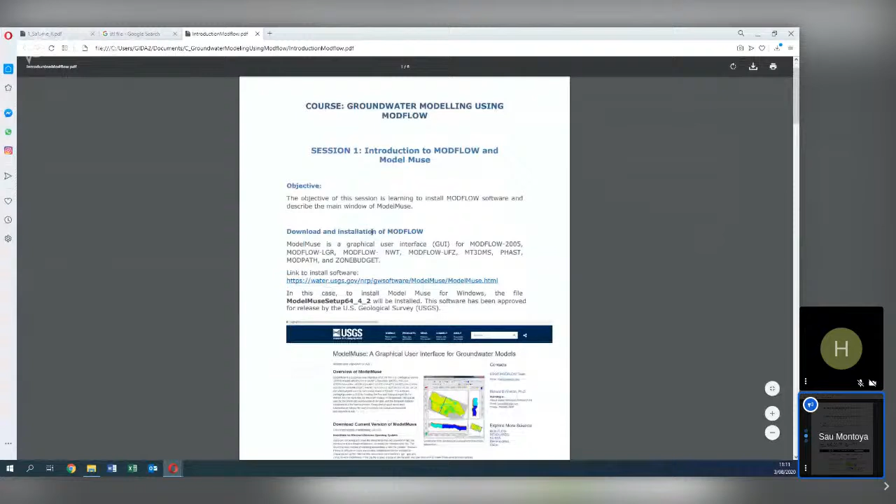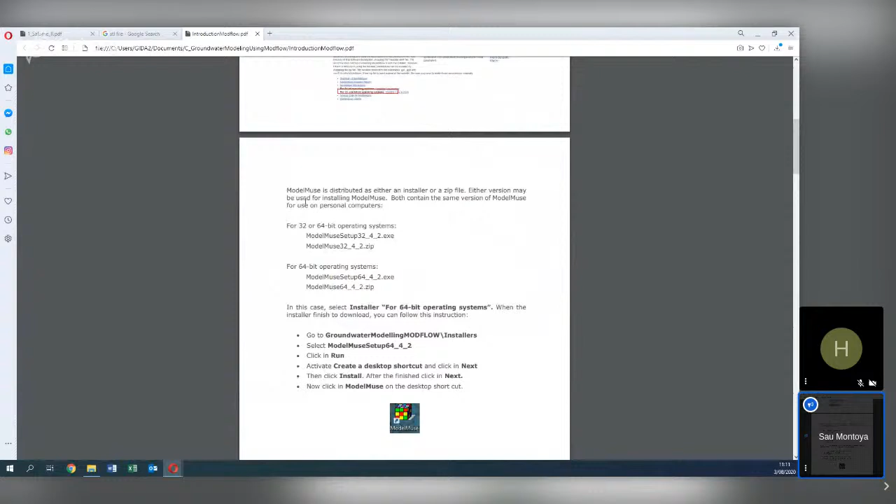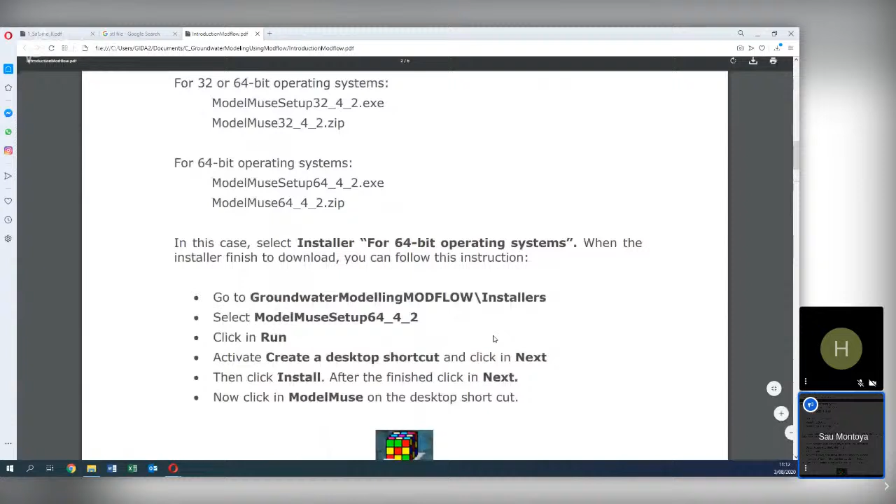So I will open this. As we have said, ModelMuse works with all of these models. You have already downloaded and installed it, that's what you told me. Now we are going to open ModelMuse. On your computer, look for ModelMuse. Actually, it opens on the other screen. So here I will open ModelMuse, and that's it. This is what appears. Maybe you have it on your desktop; I don't have it on my desktop, but if I type ModelMuse, it appears here.

And then you have these options. If you are here with me, type yes, please.

Okay, great. I will explain what is here. You can create a completely new MODFLOW model, but you can also create a PHAST model. A PHAST model is a transport reaction model that implements another code, I guess, plus PHREEQC. So this model is required when you have, for example, a contaminant plume that is degraded, or the contaminant species are being speciated into other chemical compounds. When you want to deal with that, I strongly recommend PHAST.

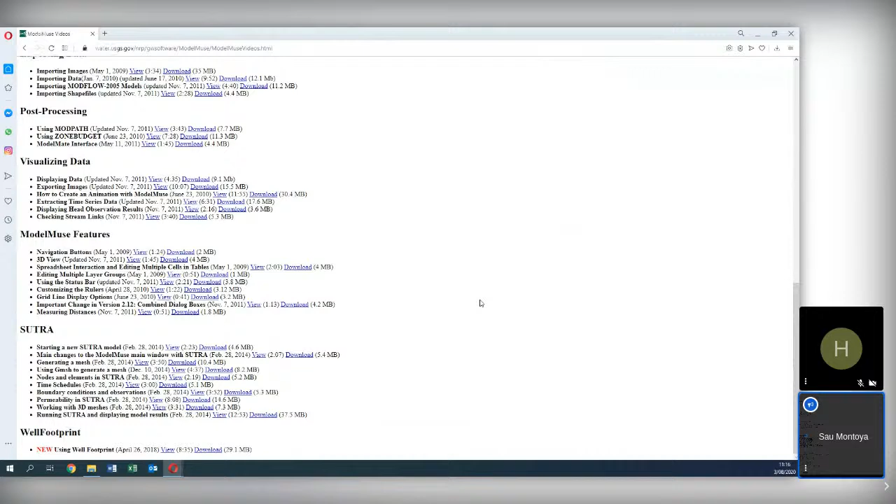So if you are learning it, or if you want to do consulting or research or your master thesis or something, I strongly recommend watching these videos, because these videos are really important if you want to know more about the software. I have watched almost all of them.

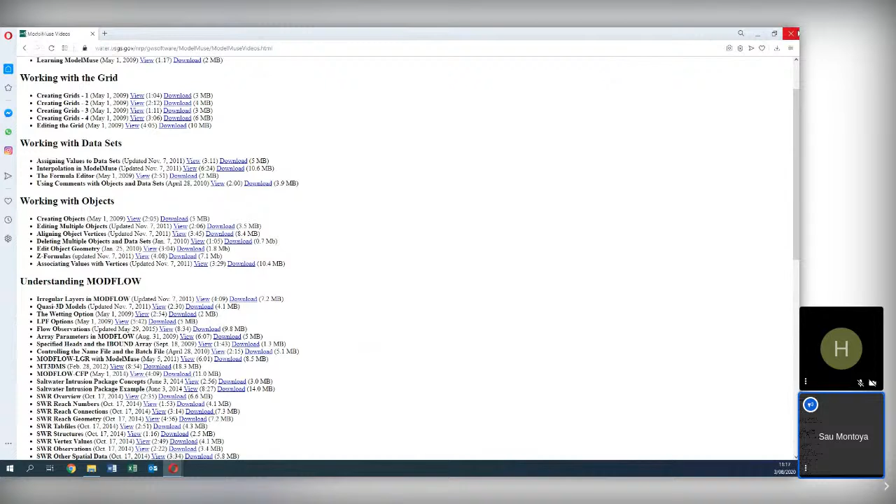Okay, so everybody create a new MODFLOW model and click next. Okay, so if you are here, this screen is informative only. And I hope that you are here with me. Let's talk about the spatial temporal topic of modeling with MODFLOW and ModelMuse.

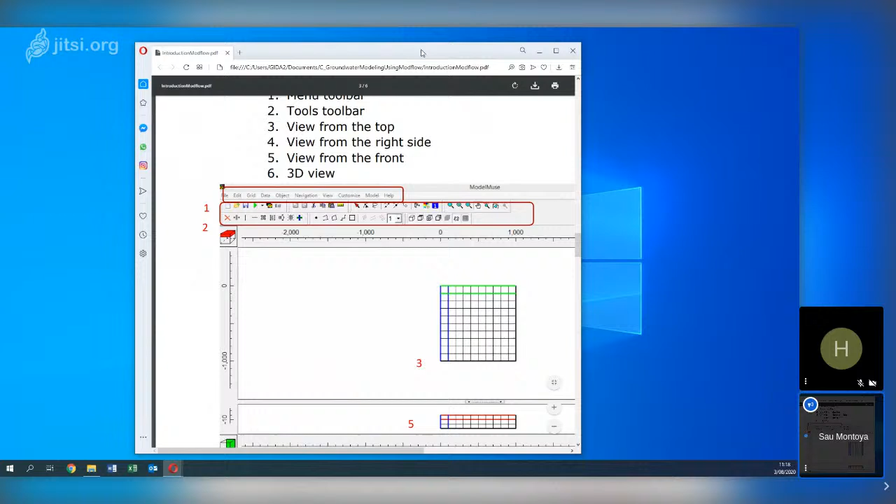If you work in MODFLOW, it actually does not care where the model is located, because what MODFLOW cares about is the grid and the position of an object in the grid. This is the first thing that you have to remember. For the model, a coordinate system is a system that allows you to put any object in the grid. But what will happen if you have to make a repository of your model, and any person five years from now has to know where the model is located?

For example, something happened and a guy only found a file that says model one, and the guy says, "Where is this model located? It appears to be a basin, but I don't know which basin it refers to." That's why here you can put some metadata regarding the projection system. With this projection system, a future user or a colleague can locate exactly where your model is located.

It can work with EPSG or Proj4. For example, here in Peru, this is our EPSG code, 32718: 32 is WGS UTM, 7 because we are in the southern hemisphere, and 18 because we are in zone 18. But this is only declarative. You are not required to use it during the simulation. This data won't be used in any part of the simulation; it is just to provide the right metadata for proper interoperability of the model.

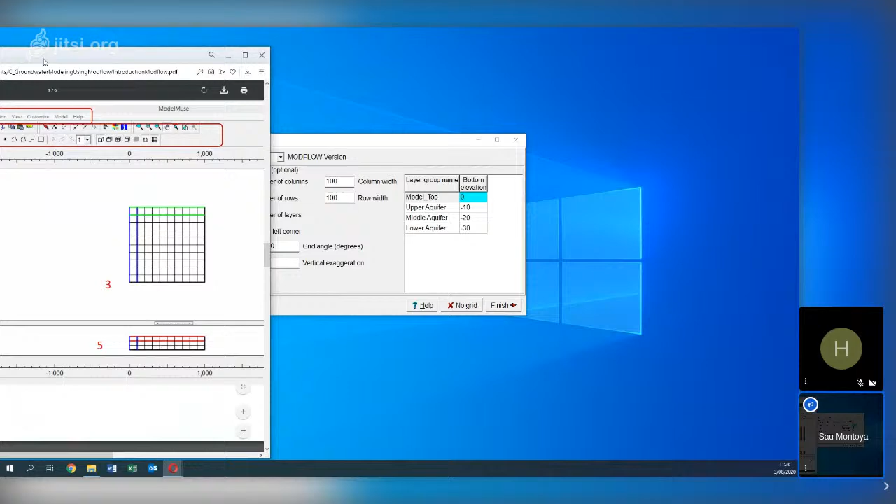Some of the tools of MODFLOW 6 are available in Model Muse, because Model Muse does not implement the unstructured grid yet. Then we have MODFLOW 2005, which is only finite difference methods, so you can create regular grids of rows and columns like this one. However, when I wanted to do regional modeling, on the scale of basin modeling with complex geometries, I could not reach the solution with MODFLOW 2005 because the matrix was very intense, non-diagonal, and the solver could not find a solution for the model.

That's why MODFLOW NWT came. MODFLOW NWT is a Newton-Raphson solver of groundwater flow that is more flexible with complex geometries, with dry cells, and I think with great changes in hydraulic properties. So if you have a K of 10 to the minus 5 close to a K of 10 to the minus 3, two orders of magnitude from one cell to the other, sometimes in MODFLOW NWT you can have better results.

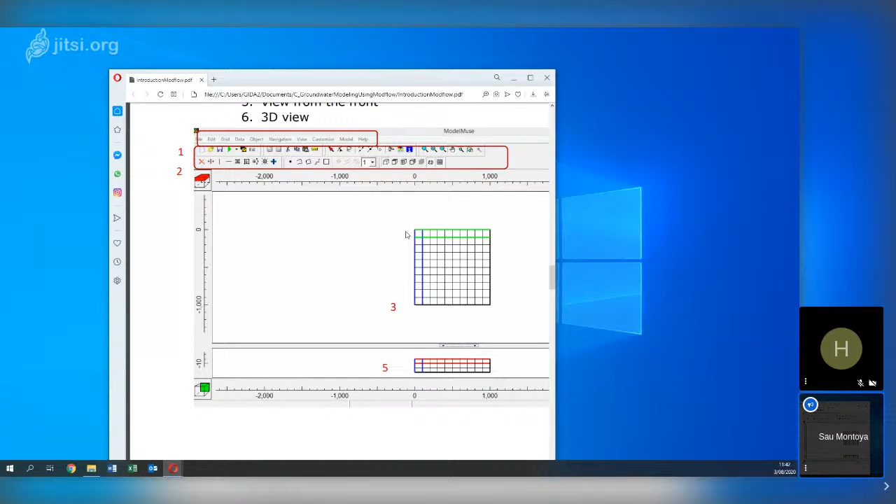That is not the same as the geospatial zero origin, because this is the geospatial origin, but for the matrix, this is the origin. So in our case it will be 1000, 1000. If you are here with me, type finish and write on the chat yes.

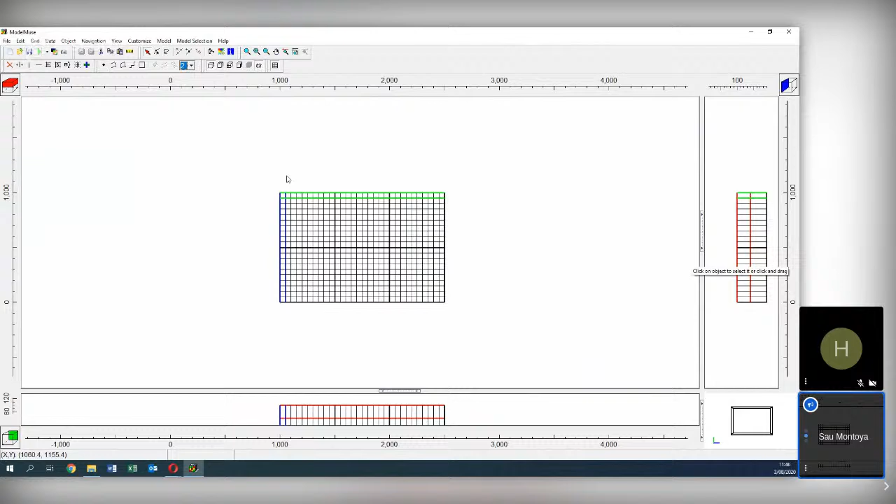Okay, so finish. Great. So here you have your model, and the model has 20 rows, 30 columns, and this is the aerial view of the model, and this is a cross section on this line, and this is a cross section on this line.

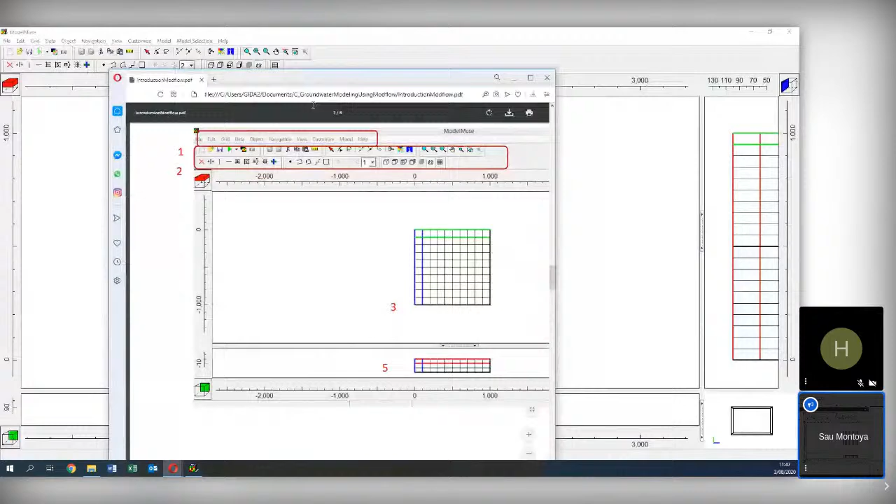Great. So the objective of this class was to show you some of the functionalities of ModelMuse. First of all, line 1 here is the menu toolbar: file, edit, grid, data, object, and so on. This is the menu, and these are the tools toolbar, where you find the tools.

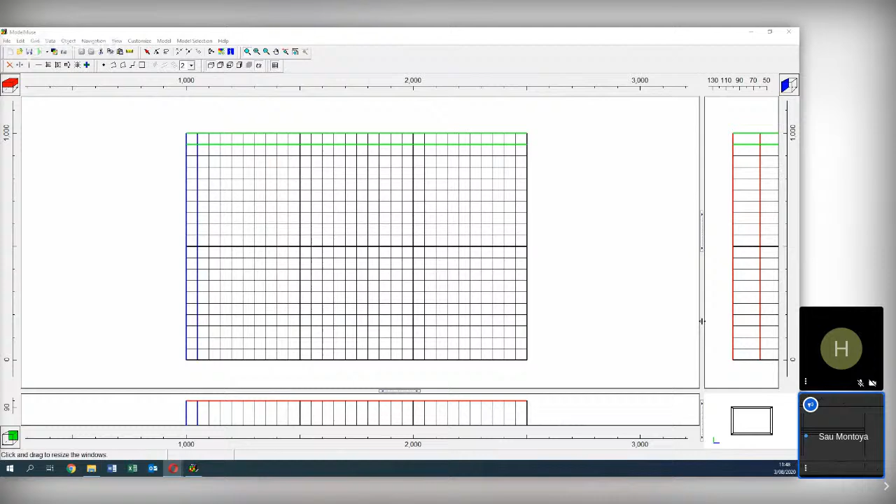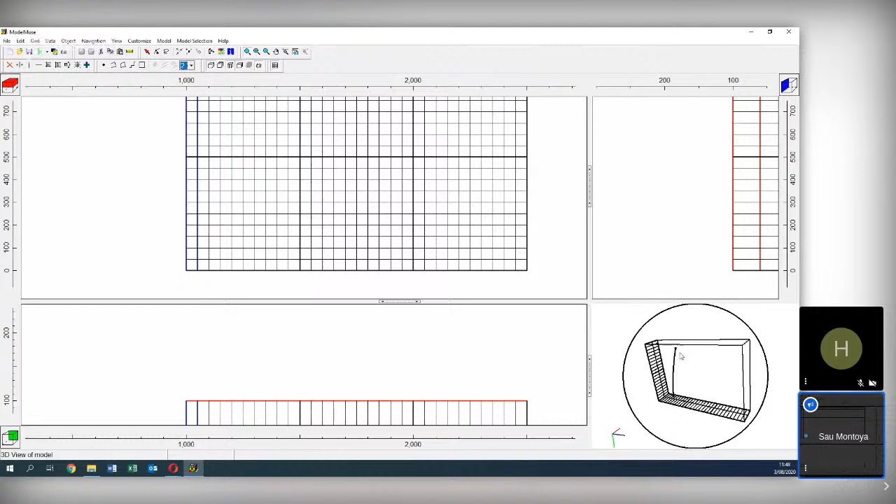This is the view from the top, this is the view from the right side, and this is the view from the front. And here we have a 3D view. This 3D view is basic, and here you can add the grid and a grid on the cross section. You can rotate it with your mouse, and with the right click and up and down, you can zoom as well. The resolution is not the best, but it's really handy when you want to locate boundary conditions or see if something is there.

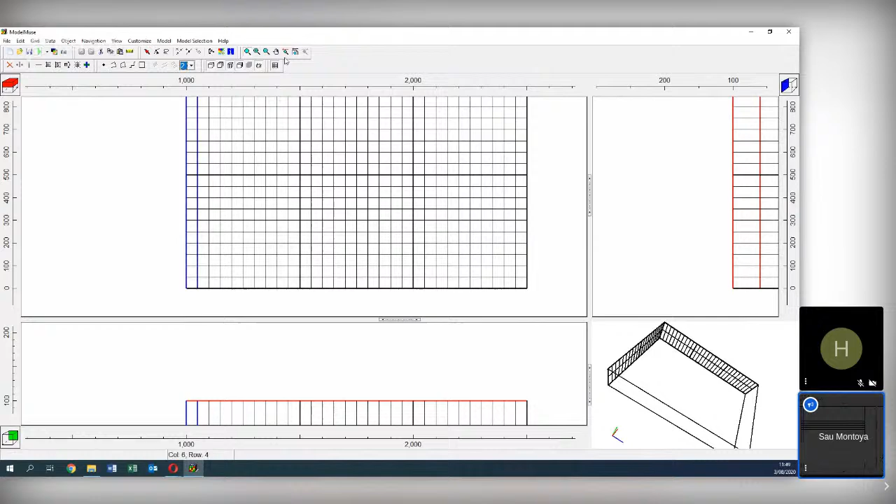Great. So let's see. We have pan with the hand. We can move our model, and we can move it on the cross sections as well. So just try this, please. You will see that the coordinate we defined as 1000, 1000 is actually this point. And you will see that some of the lines are thicker than the other ones.

Do you see that this line is thicker than the other ones? What does it mean? When a line of the grid is thicker than the others, it means it's a multiple of 10. So this is my first column, second, third, 4, 5, 6, 7, 8, 9, 10, and then you have the thick line. So if somebody asks me the number of columns and rows, I say rows 10 and 10, 20 rows, and columns 10, 10, 10, 30 columns.

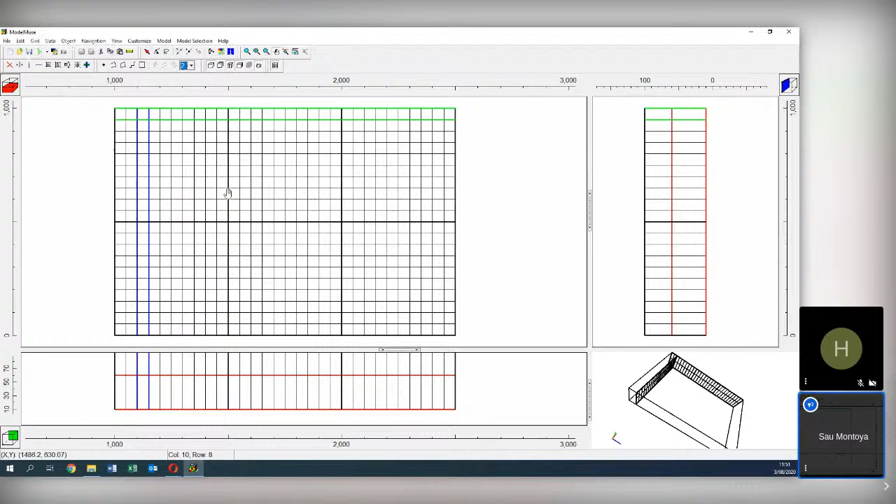And here as well you can do it with the cross sections. Here you will see some changes, because if you press here, you will see the cross section in this alignment. Since the geometry is the same, you will see the same cross section. But when you are dealing with regional modeling, there is a big difference in what you see at every cross section. Okay, great. What else?

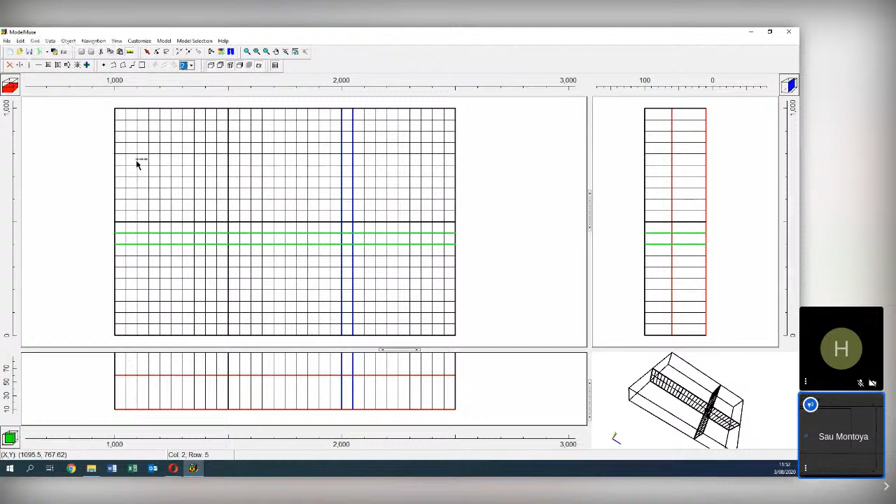Then we have the ruler, and then we have another ruler here. For example, my grid spacing, my cell size, is 50 by 50, so I can check this. This is around 50, great, and this is around 50. So I can tell you that the cell size of my grid is actually 50 by 50. Okay, great.

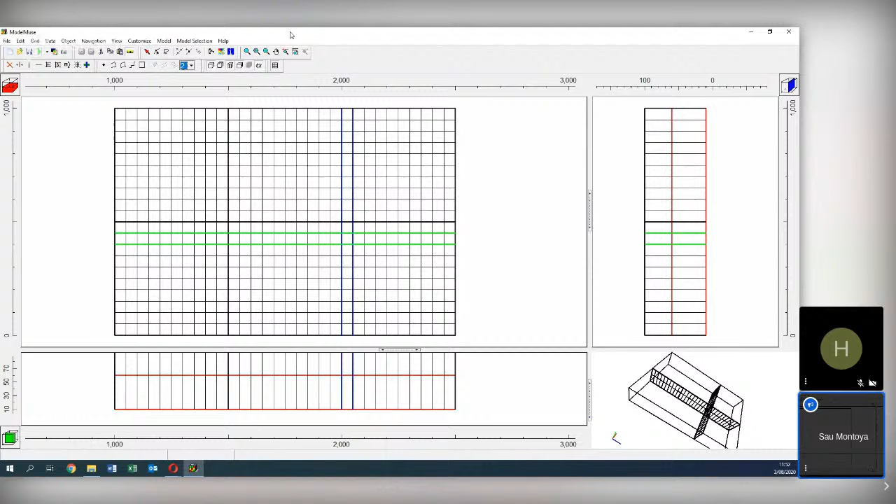And then here you can see the coordinates. What else? I can zoom in with this one, zoom out with this one, and this is zoom window. Okay, so zoom window, zoom in, zoom out, pan, and this is zoom to previous. So what does it mean? If I have done a zoom here and I want to go to the latest zoom, this is my zoom previous.

Then there is a question here: shouldn't the colors in the vertical views be opposite? I should have two cells in each, in the vertical. Why? The green color means this cross section, and the blue color means this cross section. Only the nodes where the cross section is, what you are seeing on those cross sections. Okay, right.

Let's move on. If you have followed the tutorial of the installation, you should have ended up with a folder on C, and for example here I have MODFLOW 2005, NWT, and some budget programs. For example, here what I will need is MODFLOW 6.

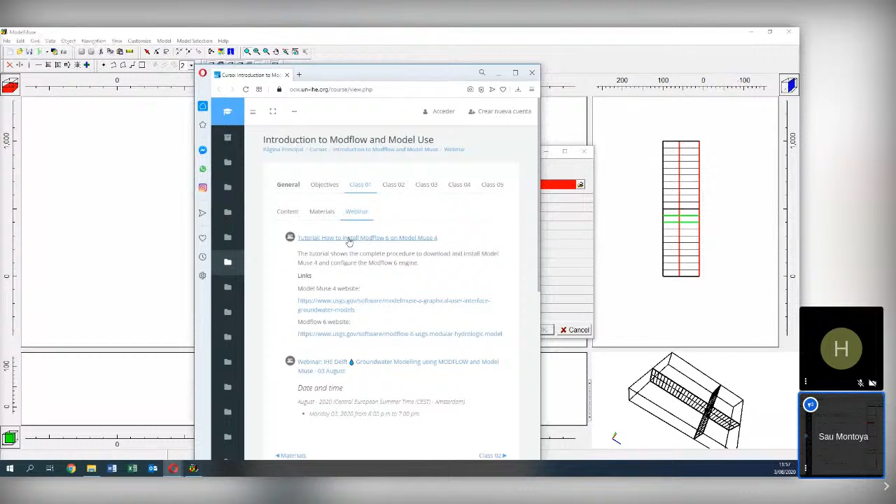The complete tutorial is here on the course: tutorial to install MODFLOW and ModelMuse. I will drop this on the chat, and then you will see the WRDAPP folder. You have to create it on your own, and then you have to place the files there. So watch till the end of the tutorial, and then you will have a successful installation. Okay.

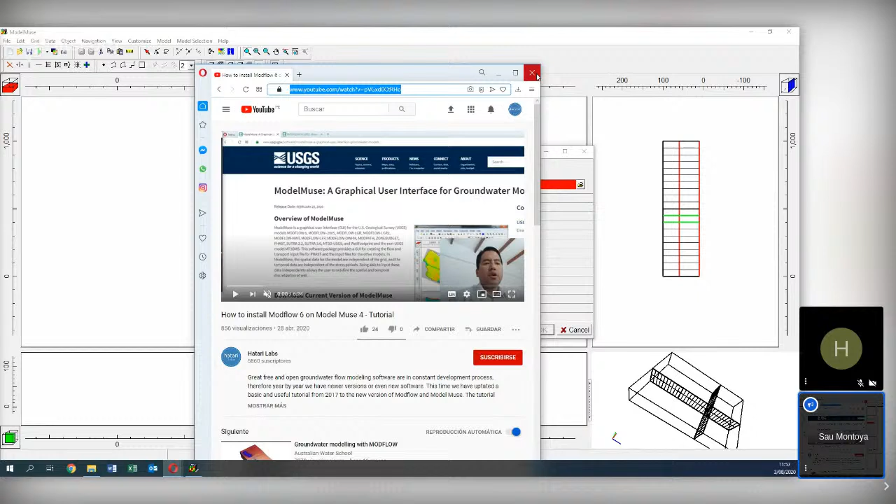So here, for example, I don't have MODFLOW 6. I do not have this, but I have here a link. So what I do is I double click here, and it will redirect me to the MODFLOW 6 website. And I say, okay, I want to download MODFLOW 6 for Microsoft Windows. Yes, open this, and it will start downloading MODFLOW 6. That is 6.1.1, that was released this latest June.

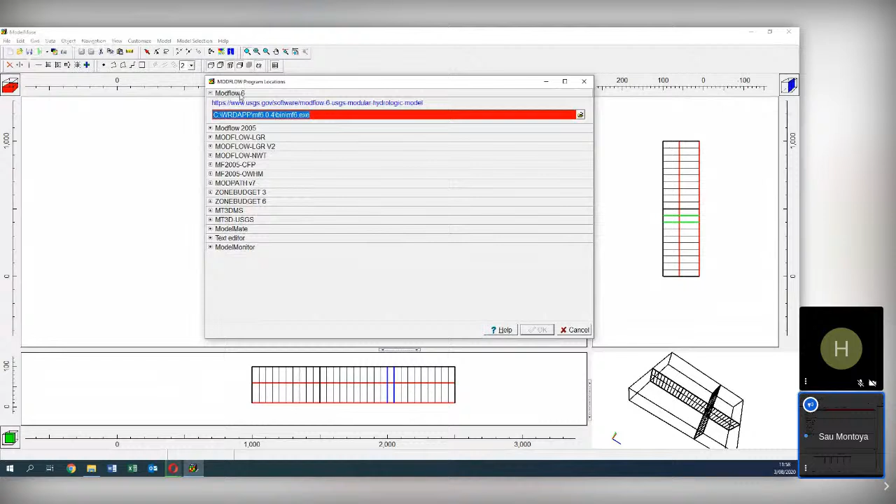Okay, actually it's downloading. It will take some time, so I can explain some things here. Here appear some of the MODFLOW options together with some other options for pre- and post-processing. So here we have the engine for MODFLOW 6.

For example, here I do have installed MODFLOW 2005. I do not have MODFLOW LGR. I do have MODFLOW NWT. I don't have MODFLOW CFP. I don't have MODFLOW OWHM. And for example, MODPATH. What is MODPATH? MODPATH is a particle tracking model, and this is coupled to MODFLOW.

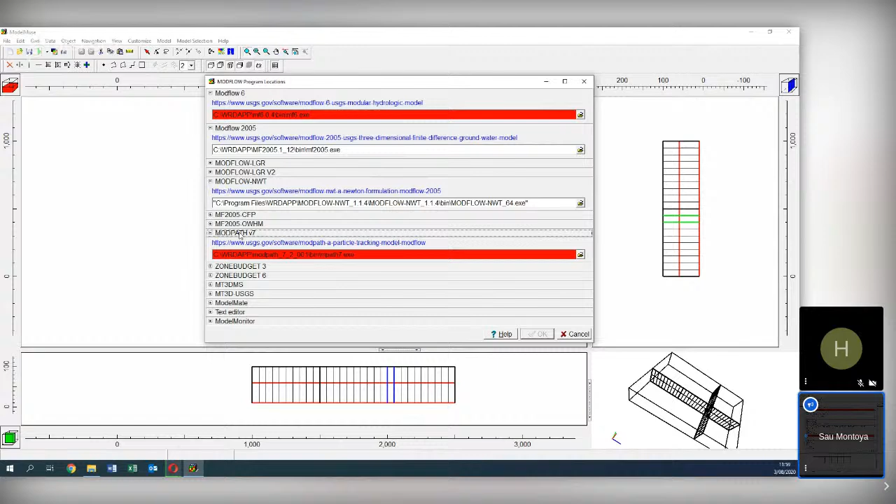What does it mean? That if I have a groundwater model and then I want to see the trajectory of any particle, MODPATH can simulate the trajectory, the path line of this particle. Then you have ZONEBUDGET, and what is ZONEBUDGET? If you want to do the water balance analysis of a certain part or a certain boundary condition, you can do it by defining a zone budget.

Then you have MT3DMS and MT3D-USGS. What is this? This is a transport model that is also coupled to MODFLOW. MT3DMS was done by the University of Alabama, around the year 2000, I guess, or maybe I can be wrong. And there is a latest version, MT3D-USGS, a code developed by the USGS that was released 5 years ago, I guess.

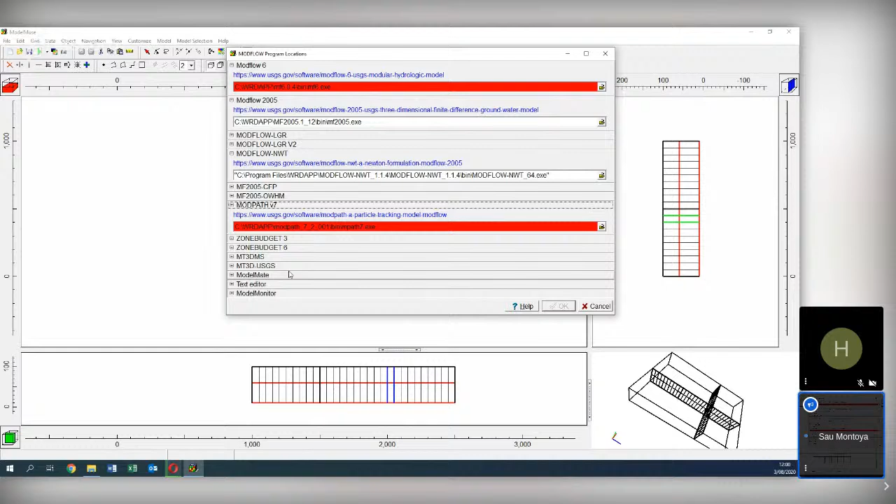If you want to do some sensitivity analysis or automatic parametrization, you can use ModelMate. And then the text editor by default is defined as Notepad, and the model monitor is this one, a utility that will help us when you run a model.

Okay, so please tell me whether you have MODFLOW 6 installed on your computer. If you have MODFLOW 6 installed on your computer, please type yes or no.

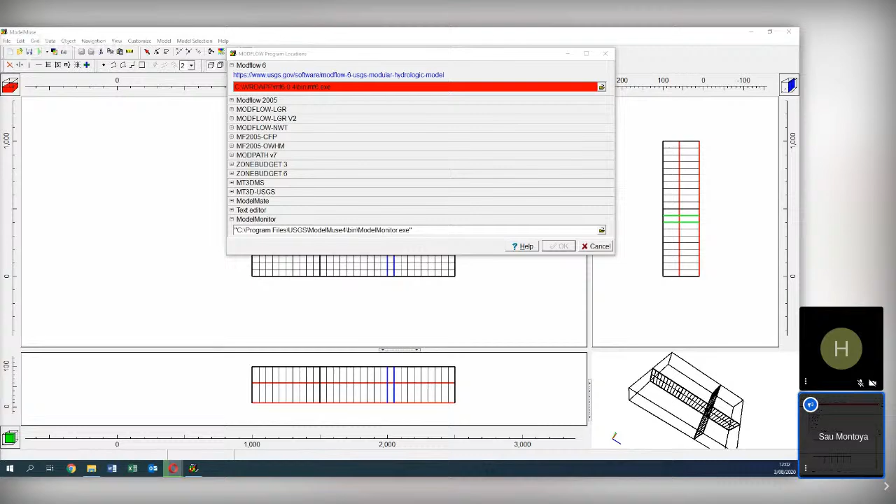Hans, are you there? Yes, I'm there. Hans, would it be methodological or pedagogic to have a 10-minute pause here, or do we go everything in a row? I mean, it's really up to you. How long do you still have to cover? The half, because it was designed for 1 hour. Okay. I think you can better continue given that people have reserved the time now and their bandwidths. Okay, okay. Yeah, so let's continue.

I can install MODFLOW 6 later. Okay, so the objective of the second part is learning the function of the basic tools. So here we have the five geometries available in ModelMuse. This is the point, the line, and the polygon. However, you have these two options that are really close. This is a straight line and a straight polygon.

Okay, so what does it mean? If you do a polygon or a line, for example, I will do a line because this is easier to show you. Okay, let's go. I will do a line. This is a normal line that you can define anywhere.

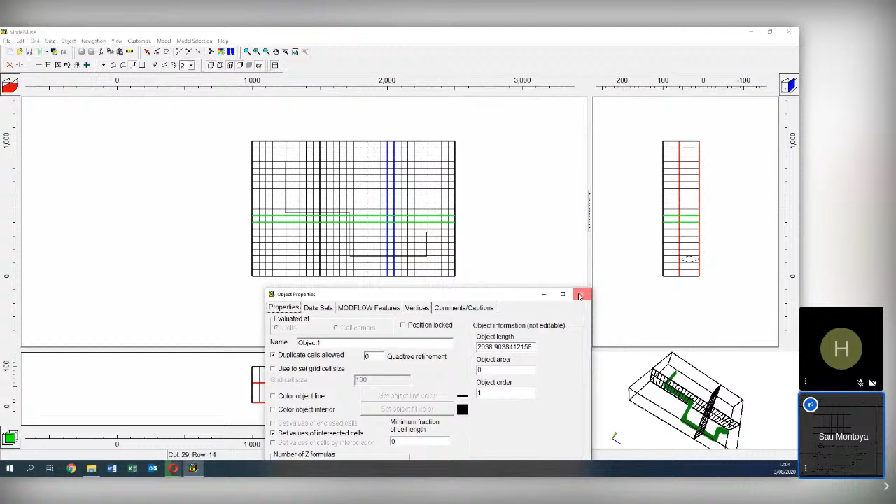But if I select this, I can do a line, but only parallel to the axis, to the x-axis and y-axis. So this is a line, but a line that can be only parallel to the x-axis and to the y-axis. Okay, great.

And this straight polygon is also a polygon, but it can only be parallel and it has to be a square. So this is the difference between these two. Actually, those are special conditions of the point, line, and polygon.

If you are going to select a river, you can do it with lines or polygons. If you are going to create a well, you have to do it with points. If you want to represent a river, it will be a polyline.

And if you want to select a wetland, you can do it with polygon. Okay? So this will be mostly related to points. This will be mostly related to streams. And the other ones will be related to wetlands or to protection zones, or will be related to contaminant sources as well.

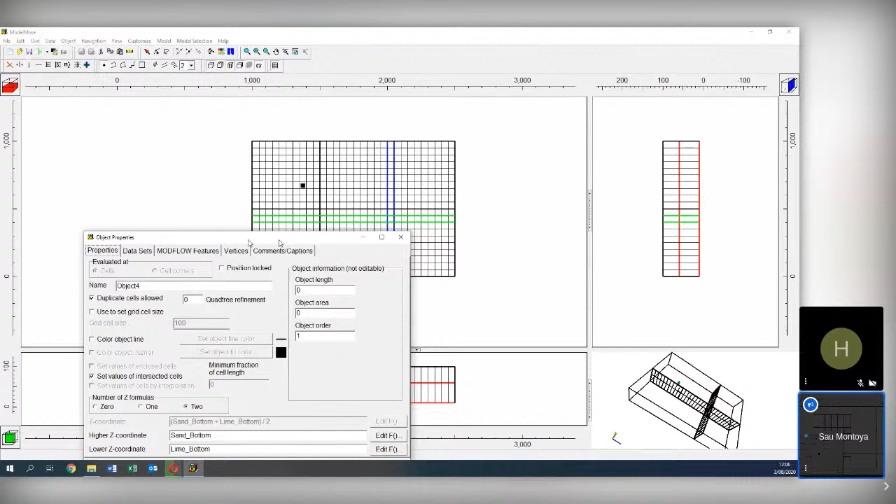Okay, let's have a look on the different conditions here, because it can be that you have some different names here, but there is no problem. Yeah, but please have a look, and then we are going to review all together.

Okay, so here this is the name. The name is actually aleatory, so we can type well, for example. Well. Okay, great. Then what else? Then we have the object order. For example, for me it is the first object order. If you have done any object before and then you have deleted it, this object order actually is the index of all the objects that are on the model. So in this case, we only have one, so it will be one.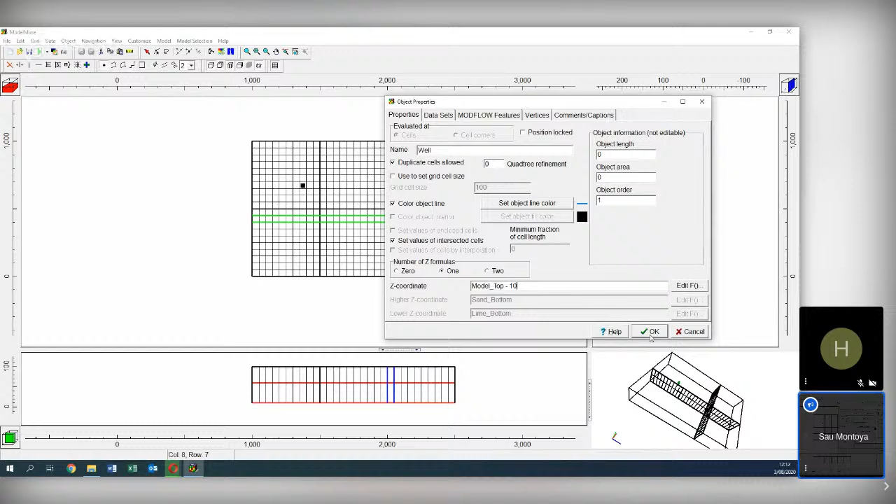And then if I go here to data, not to grid, if I switch to discretize by vertex, which we are not going to do, but there are tutorials on that, we can do quadtree refinements. Okay, that is a type of local discretization in MODFLOW, but we are not going to do that.

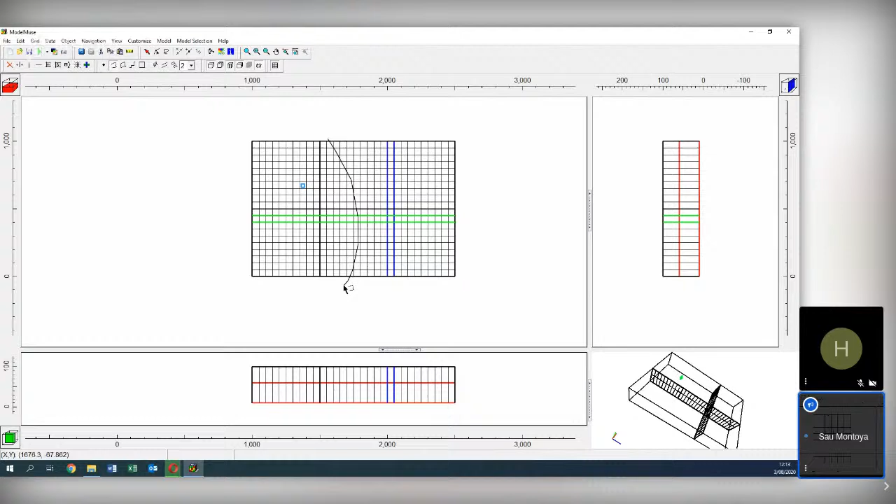Okay, so here we have our well, and then we are going to create a river. With this, we create a river that crosses the model, and as you can see here, it is crossing the model. Then I double click here, and this will be my river. And change color.

Okay, and then I just type one formula because for me my river is model top minus 2. Here. So this will be river and this will be model top minus 2. There is an option here that is position lock. And what is this option?

Imagine that you have imported your river network. We're going to see later how you can import a river network. This river network actually refers to a specific place. For example, if I don't press position lock, I can change the location of the river, because maybe I say the river was like that.

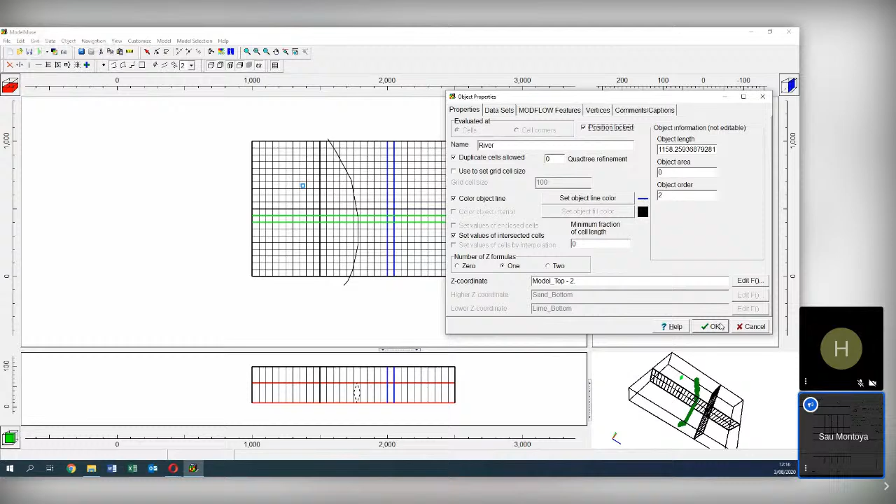And if you have a line, the object length will appear here. This is my second object, so the object order will be this one. And then I will create a polygon. With this, I can create a polygon that represents a contaminant source or something like that. To finish, I double click. And then this is the wetland, for example.

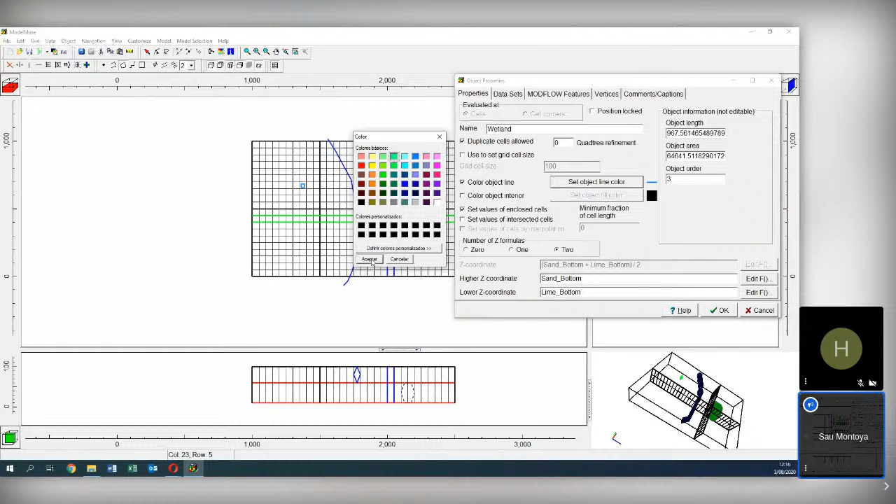I can change the color of the outer part, but the visualization options of ModelMuse are really scarce. There is an option here to define the inside color, the color of the polygon. And this one will be 3 meters below surface, so it will be at 97. And this won't be position locked, because there are options as well to change the position of the points.

And here, since you are working with the polygon, you have an area here.

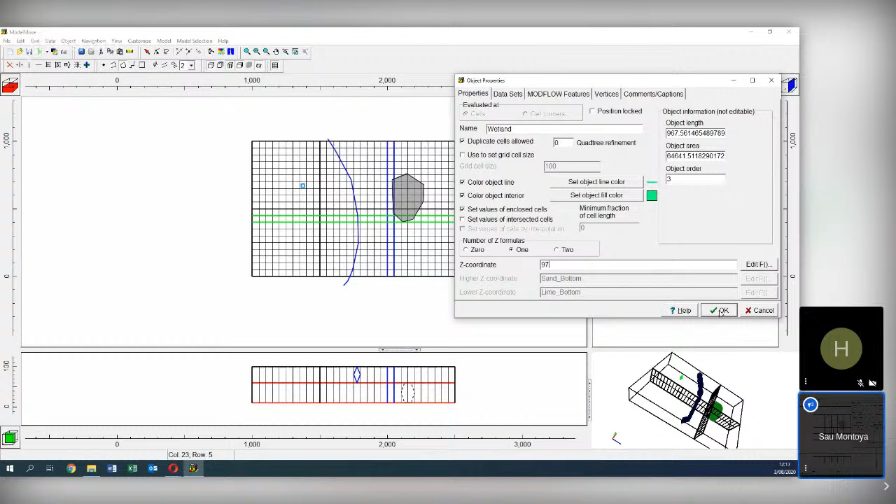Okay. Since this one is not position locked, I can do this. I can select it and I can move it. Sometimes this can be required and sometimes not on your groundwater model, because you know explicitly where your object is.

But there are other options here. For example, I can move the vertex. I can select the vertex here, and here, and here as well. I can do small edits on the spot instead of going back to QGIS, doing the edits and bringing back the object. I can do the edits right in ModelMuse.

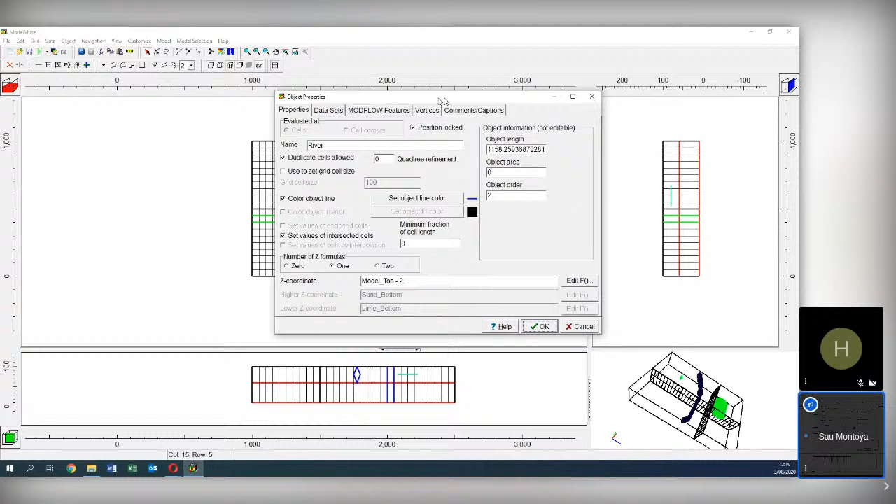Great. So, for example, I want to see if the river is position locked. I select it with the red arrow. You know it's selected because the vertices appear, and then you double click here, and it says it's position locked. So actually, I cannot change this.